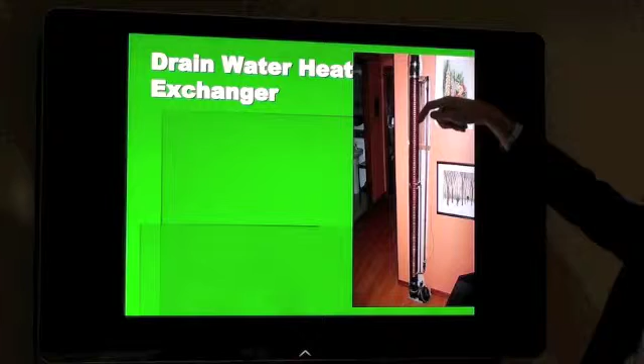Heat primarily from showers. When the shower water goes down here, the cold water goes around the outside, and it transfers heat to the cold water, and as a result, during a shower, roughly about half of the heat that's going down the shower is recovered.

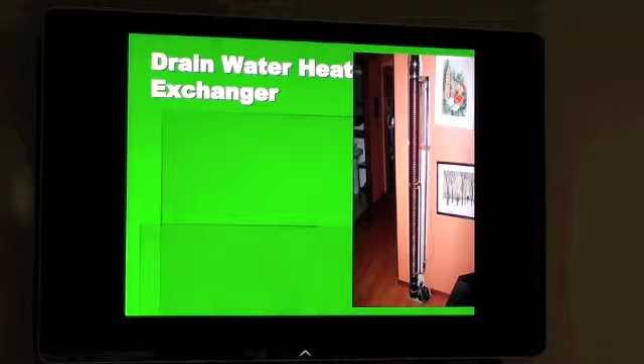So it's a device. There's now, I think, 3 or 4 companies that sell these units. We have one right here, I believe. Yes. And I think there's a Saskatchewan company that made this. Is this correct? I'm not sure though. Okay. I should check them.

But a very simple device. There's no moving parts. There's nothing to wear out. No valves or moving parts or anything like that. And typically, I think on a house, you can save roughly about 100 watts of energy on average, again, on that baseline of 500, by using this device here.

Where does the heated water go? Yeah, the cold water comes in at the bottom here, and it's split into 2 portions. Some of it goes around the lower part, and then some of it goes to the top. And then after it comes out the top here, the best arrangement is to hook it up to two locations. One, hook it up to the inlet to your hot water heater. So it pre-warms the water before it goes to your regular electric water heater.

And if you can do this, and you can't usually do it after the fact, you should also hook it up to the cold water line on your showers. And this way you're getting preheated water going to the cold line on your shower, and that gives you the greatest performance. And in my house I didn't do that. I was only able to connect it up to the water heater, because all the other stuff was all built in.

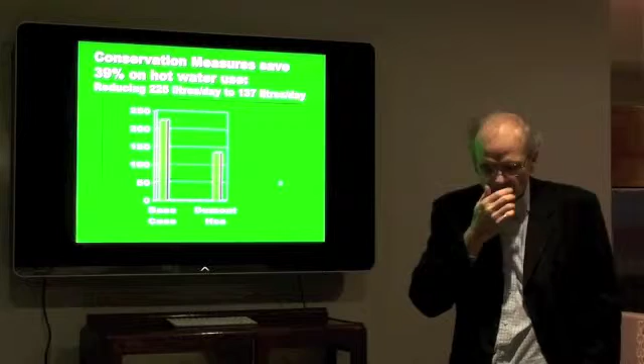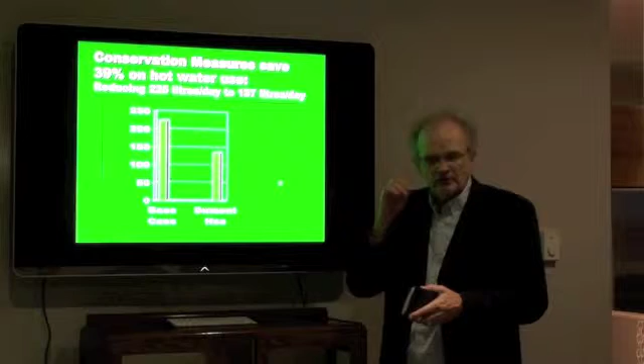So the first thing is the conservation measures. Pursue them first. And here's the measured numbers. The base case, your average house uses around 225 liters a day, and we've reduced it down to 137. In my archive of consumption values, I have numbers going back to 1993 when we first installed the meter. And at that time we had a top-loading washing machine, just ordinary shower heads, and we were consuming up above that amount.

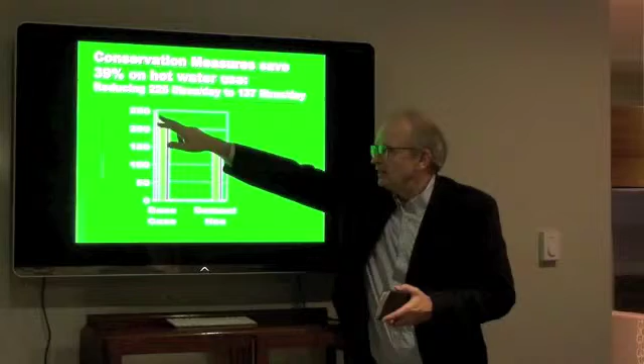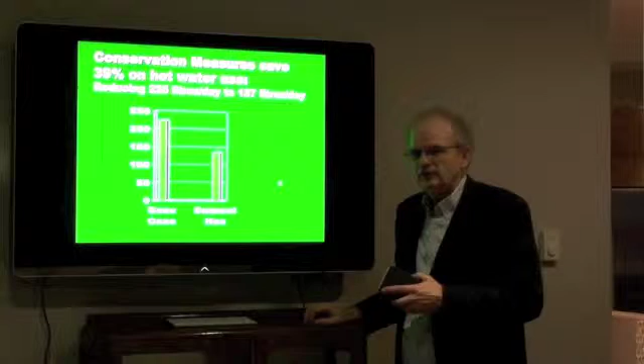So these numbers here are reasonable ones in terms of what you can expect from it. If you were to use only cold water for your laundry, you'd probably knock another third or so off of this, I think. But you might lose some friends from the fallout.

One of the articles I read on the grey water recycling is that if you can hook it up to the tap, you actually use less hot water from the tank to start with, because you're mixing warmer water. That's correct, yeah, that's right, there's a secondary effect to that. Yeah, so you would probably reduce it as well from that.

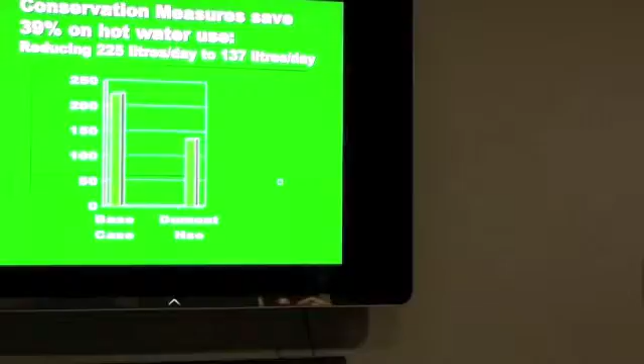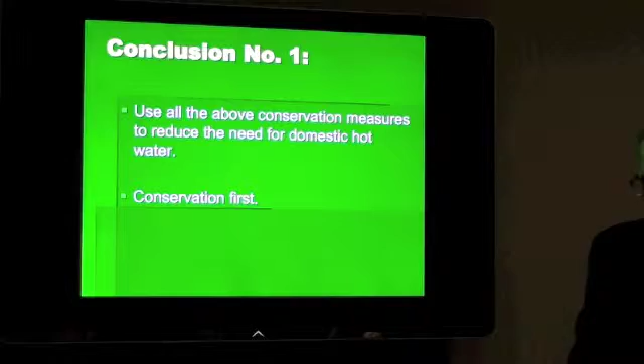So, first of all, apply the conservation measures. If we go back to this list here of all the various things, you know, this thing plus the more efficient laundry machine plus the more efficient dishwasher, I think for about $1,500 you can achieve that roughly 40% reduction in a new installation.

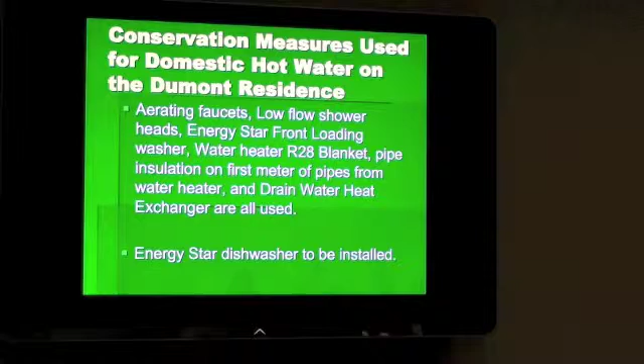And I think actually if you shop around, quite often nowadays an Energy Star dishwasher can actually be roughly the same price. They don't seem to be marketing them on that feature very much, but it is a...

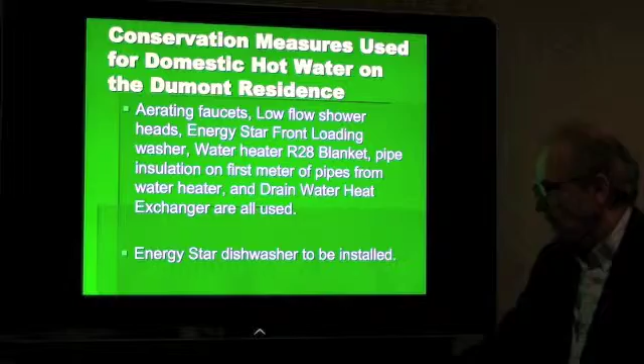So in my house, if your average water heater is using maybe 500 watts, we've got it down to roughly about 300 watts by applying these conservation measures. And that thing there, and the more efficient laundry unit, is a big part of the reason for that.

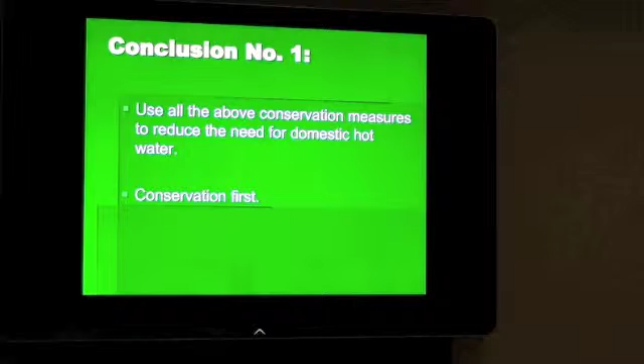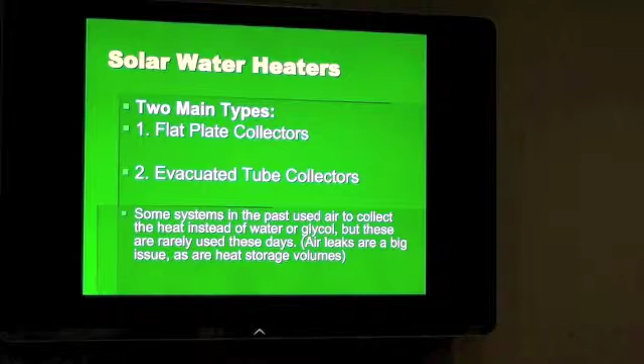And there is quite a bit of energy available. When you're facing the sun on a sunny day like today, you can get about a kilowatt, 1,000 watts of energy per square meter from the sun. With that, we'll pass this around, you can have a look at it. People have built their own solar collectors, but there's a lot of companies now that make commercial ones.

And the other type of collector are the evacuated tube units. Here's an example of an evacuated tube. Most commonly they're in a manifold, and there's a vacuum between the inner and outer glass layers on the units. And there's some kind of a highly absorptive coating inside the unit here that captures the heat.